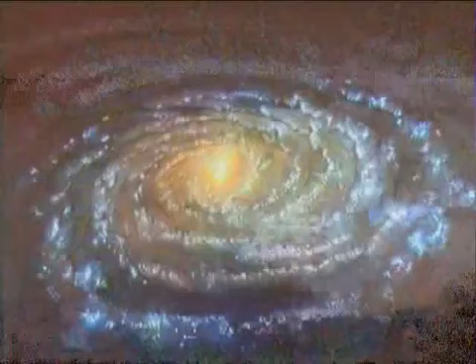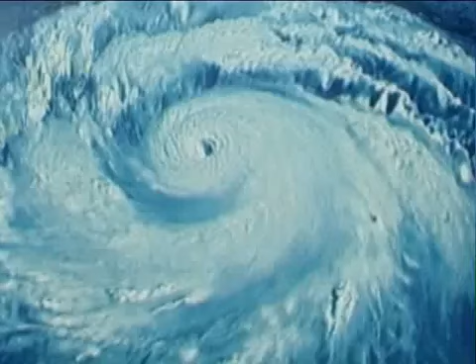And we don't perceive, even with so many spiral formations and spiral movements around us, in terms of the spiral motion of galaxies, in terms of the spiral movement of cyclones, tornadoes, and so on, that nature has chosen these shapes because they represent those artifacts, those formations, which follow her laws of constant change. Because the only thing which is constant in nature is change. And if we want to create a system for water reticulation, then we must also create, within the forms we provide, the possibility for water to change and transform and renew itself.

Viktor Schauberger, born in Austria in 1885, was descended from a long line of foresters and conservators of the forest, and in his blood he therefore had an enormous amount of information inherited, so to speak, genetically from his forebears. And the family motto was, 'Have faith in the silent forests.'

As a young man, he spent most of his time in the forest, and there he was able to perceive energetic phenomena in nature, in untouched virgin forest, which gave him so many insights into the way nature functioned, and particularly with regard to water.

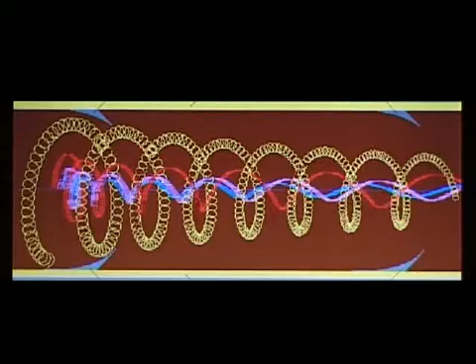In the reticulation of water for drinking purposes, it's important to generate this longitudinal vortex. While the central flow is a simple spiral, the external peripheral flow is a double spiral movement, a rotation about the central spiral, which acts like ball bearings and facilitates the faster flow of the central core water.

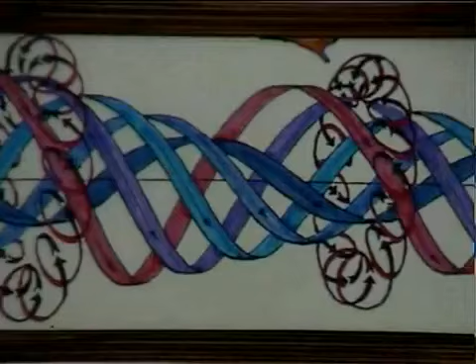This double spiral movement is inaugurated by the emplacement of guide vanes which deflect the water from an otherwise straight path into a spiral path. In Viktor Schauberger's concept, these would be silver-plated copper placed in a wooden pipe at certain intervals to create, provoke, or promote this centripetal spiral flow.

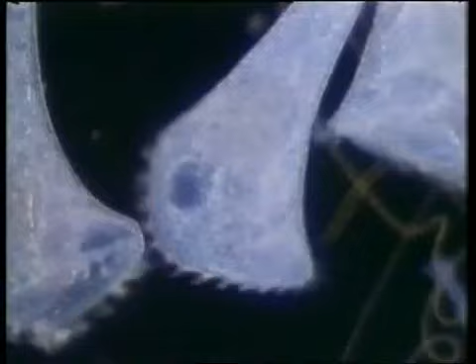This spiral movement is the rejuvenating movement which endows water with fresh energy, and also because of the movement and the way oxygen is separated from the core water and diverted to the outside, certain pathogenic, anaerobic bacteria are exposed to excess oxygen and die off. The longer the movement down such a pipe, the purer and more bacteria-free the water becomes.

Water has certain patterns of motion. It has certain energies, and these energies are derived from its motion. Unless it is able to move in the way that generates its energies, it becomes sluggish and slack. It's very important for water to be able to generate a longitudinal vortex in its flow, which enables it not only to reoxygenate itself, but also to cool itself.

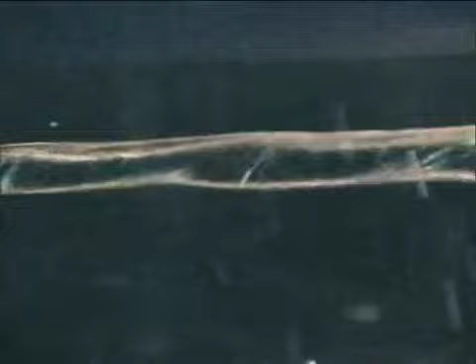The oxygen is passive and not aggressive towards the water itself. Because of this movement, the water is cool, and after it has disposed of all the pathogens by over-oxygenating them, it returns to seek union with those mother substances which are as yet unfertilized, and this increases the energy, and of course there's a certain amount of birth of new water in the process.

So you have a tremendous rejuvenation of the water body on the way to the point of delivery. The core of the vortex is identifiably cooler than the surrounding water masses, by as much as maybe 0.2 of a degree centigrade. In their summation, all these little cooling processes mean that water, when allowed to flow naturally, cools itself quite considerably.

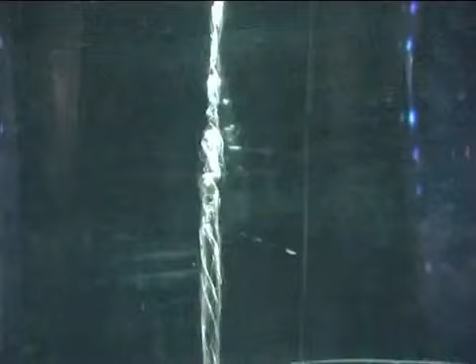And so the vortex is a cooling process. Not only that, the water re-energizes itself, and it also divests itself of harmful parasites, pathogens and so on. Because of the difference in the specific weight of oxygen and hydrogen in the water and other substances, the oxygen is thrown to the side of the pipe and directed to the pipe walls.

Water moving in such a way can transport ores and other material down the center of the water vortex without touching the sides, and can actually improve the quality of the ores, such as iron ore, in transit on the way to the point of use.

Because as the oxygen is gradually consumed, some of it by the extermination of pathogenic bacteria, there is a reduction process occurring in the water flow itself. So the iron ore is already partially reduced, so to speak, before it arrives at the smelter.

Our spinal column in German is expressed as a spiral column, and each of the vertebrae are called vortices. When you take this image in conjunction with the German view of the structure which upholds the human body, here again in their concept it is also related to movement and vortical movement.

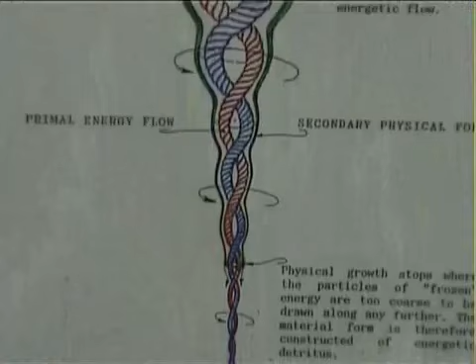Energy is primary and physical form is a secondary effect. In terms of the DNA molecule, that is the programming which creates the whole of the physical body. So in elaboration of this movement, energy creates the pathways through which it wants to move, or in which it wants to express itself. It's very important to begin to employ systems, or convert existing systems, into ways of moving water.

This follows the law governing the flow of water, takes temperature into consideration, takes the alternating, pulsating movement of water into consideration, because this is a living substance, and it cannot impart life unless it is itself alive.

There's this constantly changing aspect of natural form, reflected in seashells and in the dynamics of the universe - this whorl shape. Nature isn't workings with wheels in wheels, but whorls in whorls - one spiral moving inside another as energy, because energy must be remembered as always primary, and physical form is the secondary effect.

We have to turn this around in our heads and remember that energy is primary, that nothing can appear in the physical until it has first been conceived of energetically. The formation of anything physical is the concentration of the image until the physical form is realized. This is one of the things Viktor Schauberger stated on many occasions: energy is primary and physical form is the secondary effect.

This concentration of higher, immaterial energies gradually coalesces into energies of a lower frequency, finally having the physical effect in the physical form.

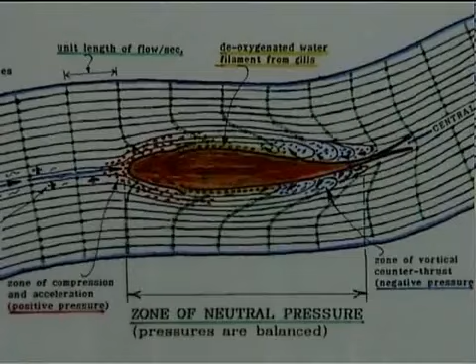So in terms of the trout, it sits with its body in the center, in the coldest core water of the stream. As the water filaments approach the body, they get squeezed aside and, in the process, accelerate. As they accelerate, they exceed their specific velocity relative to temperature, and turbulence occurs on the rear flank of the trout, which acts to actually propel the trout upstream.

The trout breathes in, taking in water through its gills and extracting the oxygen from the water, a large part of it, so that the water passes out in a semi-oxygen deficient state. As a result of its lack of oxygen, it absorbs oxygen from the surrounding water and expands, and this expansion pushes on the back of the trout, squeezing it forward like a bar of soap.

When it wants to accelerate, it flaps its gills very fast, which creates more turbulence. Also, because there's a greater expulsion of oxygen-deficient water, there's a greater expansion of water behind it, which pushes the trout forward upstream.

When we approach a new way of designing or a new way of looking at moving water, we have to design a process which allows water to change, to transform, to move, and to be itself, fundamentally to be itself.

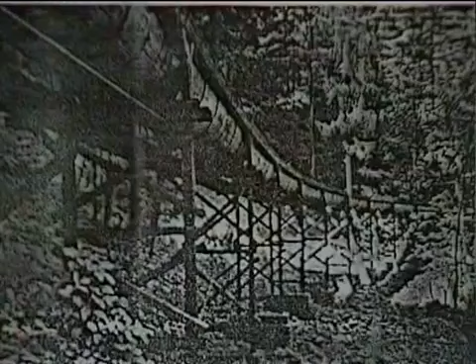There was a time when Viktor, fairly early in his days, built a log flume for the transport of logs down the mountain. It was to be constructed out of timber, in a half-egg shape profile made of wooden slats. When the workers asked him where they were going to build it, he said, you see the valley here, and see the river.

He said, that's the way the energies like to move in this situation, so we copy that. One of his great adages was: comprehend and copy nature, because nature knows best how to do things, and has known best for years.

It's only human beings who decide arbitrarily to impose their own laws, or what they think are laws, which are actually only half laws. In the case of gravity, for instance, there's the total negation of levity — there's the law of gravity, but there's also the law of levity. In fact, there's the law of both together.

So in this log flume, built to follow the contours of the valley, there were slats attached to the walls on left-hand bends and right-hand bends, so that the water was caused to rotate, forming longitudinal vortices, anti-clockwise and then clockwise, as it went around these bends.

In this first instance, built in Steyerling, this was constructed for Prince Adolf zu Schaumburg-Lippe, who was the owner of great forest estates, and the actual length of the flume was about 2 kilometers.

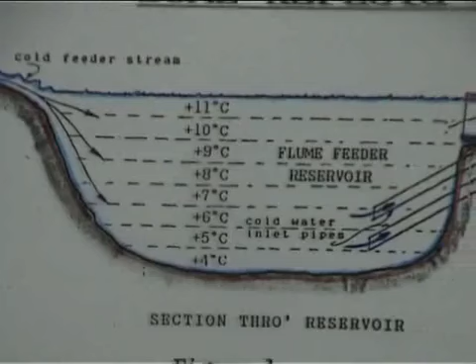The water temperature was very strictly controlled. Viktor determined that in order to make the flume function properly, in order to generate the right energies, it was necessary to introduce different temperatures of water into the flume.

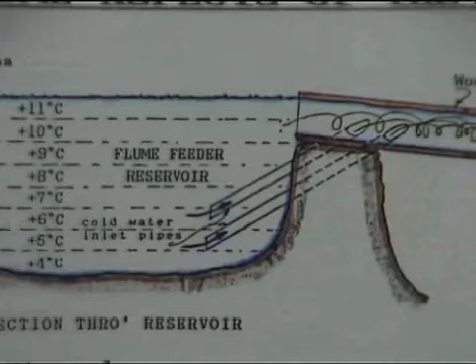From the surface of the water to the bottom of the holding basin, there's a thermal stratification — the water stratifies itself according to temperature and density, so that the coldest water, the 4-degree water, is at the bottom of the basin, and gradually the water heats as it goes towards the top.

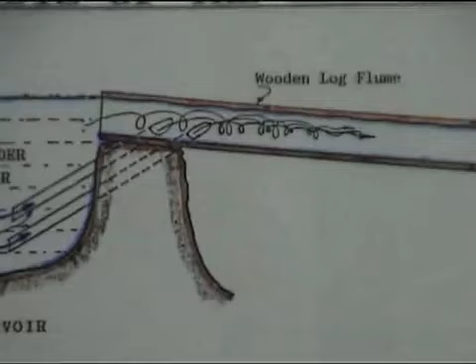There would have been a pipe taking the bottom 4-degree water out, another maybe at 6 degrees, and another taking the 9-degree water out, and these would have been introduced into the flume tangentially, so that they automatically inaugurated a spiral, vortical, longitudinal movement, in which the coldest water would have been at the center, surrounded by water with less density and greater temperature.

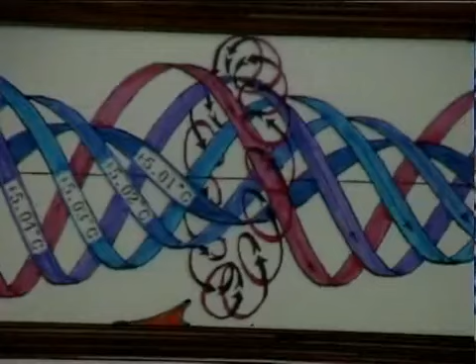The colder the water is, the more laminar its flow. That means it's more straight line movement, although it was still spiraling. And the logs, the heavy beech logs, otherwise called sinkers because they sank to the bottom, were suspended in this central vortical flow of cold water, because they were denser than the densest water, and the only place they could be was in the center of the dense water. And they were conducted all the way down these flumes without touching the sides.

His flumes were so successful that about 9 of them were built. It was this phenomenon that enabled Viktor to transport logs, which were heavier than water, down his log flume without touching the sides. These logs were known as sinkers because normally they were heavier than water and dropped to the bottom. But because of this centripetal, involutionary, inward-moving spiral from the outside towards the inside, the densest part of the water mass was in the very center of the flow, and the logs, being denser, had to occupy the densest position, surrounded by the immediately denser 4-degree water.

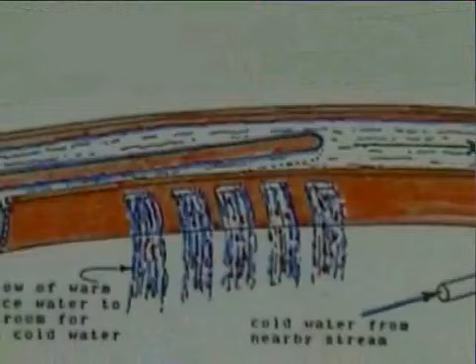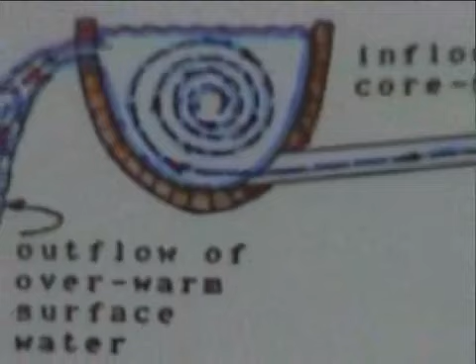So in moving down the log flume, there was a suction created in front of the log because the coldest water was accelerating, which actually sucked the log along in its wake. Periodically, because these different water temperatures eventually mixed and tended to become uniform, Viktor used to allow some water to drain out and at the same point introduce what he called energy water, very cold water from an adjacent spring or stream with a temperature of about 4.5 degrees centigrade, in order to reintroduce this central charge of very cold water which would continue to accelerate. And this is really how the log flume worked.

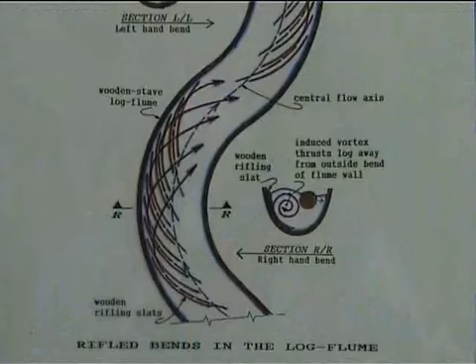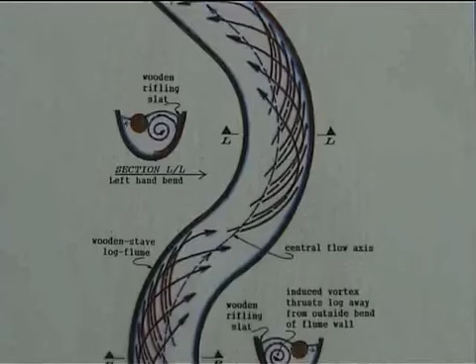There were other factors involved, relating to the way the water was caused to rotate in anti-clockwise vortices on left-hand bends and clockwise vortices on right-hand bends. To do this, Viktor had his workmen nail slats at an angle around the outside surface of the bend. The water encountering these slats was imparted either a clockwise or anti-clockwise spiral, so that when it emerged at the surface, the log was always pushed away from the bend, meaning the logs passing down the flume never touched the sides. The flume was therefore never damaged in use, nor were the logs, and they arrived in absolutely impeccable condition.

On the first day it was used, one of the criteria determining whether Viktor was to be paid was whether the flume would deliver 1,000 solid cubic meters of timber in one day. On the first day of operation it delivered 1,600 cubic meters of timber, and Viktor Schauberger was paid. Everybody else, all the experts, were furious at this success, because it showed that somewhere in their hydraulic theory there was a great error, a great misunderstanding of water.

Viktor used to say in this regard: how can you possibly understand how water, a living substance, behaves when the only place you test it is in laboratories instead of out in nature, where water acts in relation to nature's laws and not the laws you have contrived in your places of research.

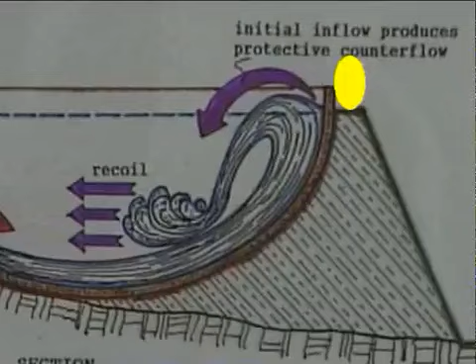Viktor gave them no answer and went down and stood right in the middle of the wall opposite where the water was going to flow in. Then he gave the signal by firing two shots of his carbine to allow the water to rush in, which it did with tremendous force and volume. Viktor said to the people gesticulating, saying 'Come back, you're going to be killed,' he said, 'What does it matter? If I'm a fool, then I'm going to be swept away, and so will my theories at the same time. But I believe in what I'm doing.' And so he stood looking over the wall, watching the water flow in.

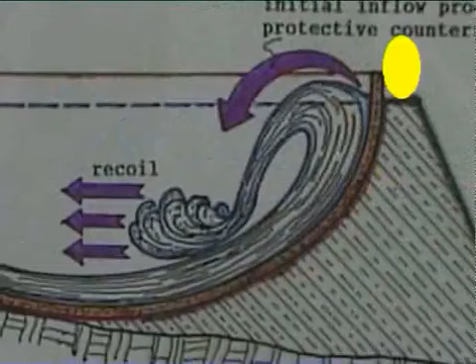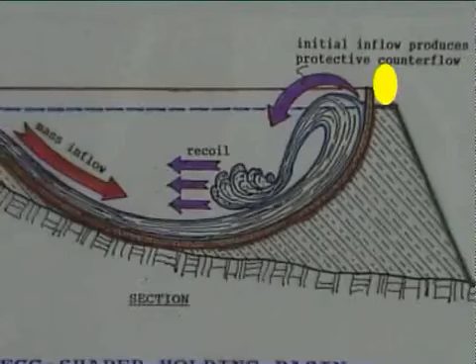And the water actually flowed in around the sides of this egg-shaped basin. When they converged at the far end, they produced a counter wave which moved back in the direction of the inflowing water, about 4 meters high, full of mud and rocks and things, and therefore exerted a counter pressure against the incoming water, and the egg-shaped holding basin held.

And the experts were absolutely dumbfounded. Why should it have done this? And they then asked him, where did you get the idea for this basin? And Viktor said, well, a common chicken told me how to do it.

And finally, when they calculated the strength of the walls statically, they were found to be 12 times stronger than they need have been in order to resist the inflow of water and to be able to support the sides of the basin when it was full.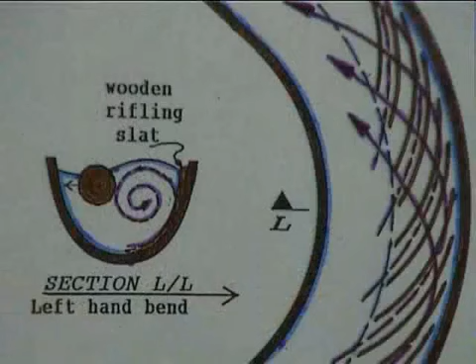So this log flume is an example of how we might construct systems for moving water where there is a continual alternation of movement, of swaying movement, with different vortical flows, so that the water is able to regenerate itself and to cool itself. Preferably these should be enclosed, so that there is also no access to the water from the sun and from extra too much heat.

They timed a block of wood flowing from the holding basin down to the mill in the early morning, when the water temperature was about 8 or 9 degrees, and it took 29 minutes to cover the distance. Later in the afternoon, they got the same block of wood over the same distance, and the water temperature had by this time risen to about 14 or 15 degrees, and the block of wood took 40 minutes to cover the distance. So it shows that with increasing heat, water flows more slowly.

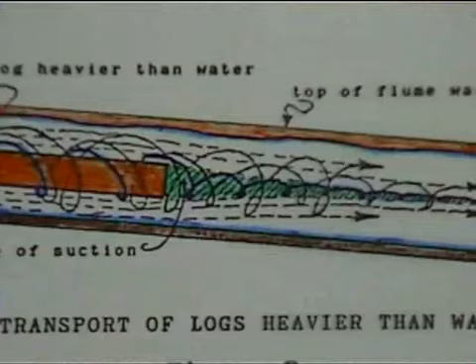So this process was employed in his log flumes, and it is a basis by which we could redesign any new water conduits which have to be constructed in this country.

There are other systems which probably could be used to improve what is there already, and that is the incorporation of vanes in an open channel, which would cause the water to rotate as soon as it hit them, making the water rotate or make a double spiral movement down the center of the channel, which would again allow water at least to breathe and reoxygenate itself and to cool itself to a certain extent.

But flowing in straight trapezoid channels, which is the general system of moving water according to modern hydraulic theory, physically kills water until what arrives at the other end, the point of use, is virtually a water corpse, apart from the fact that it's also been chlorinated, and the chlorine, while it does remove bacteria and other sort of unwelcome organisms, will also finally sterilize the blood from people who drink it all the time.

And research has shown that 18% of bladder cancers and 9% of intestinal, rectal cancers have been caused by the consumption of chlorinated water. So when we drink chlorinated water, we actually harm our immune system, and we drag it down to a level where the body is more likely to fall victim to disease.

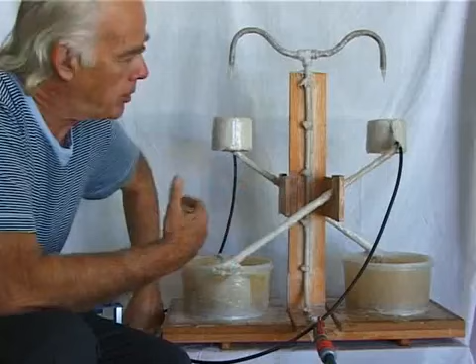This is a device. The arrangement of it was first designed by Lord Kelvin about 1880-85, and he called it his influence machine, because it demonstrated the influences of fields, in this instance static fields and positive and negative fields.

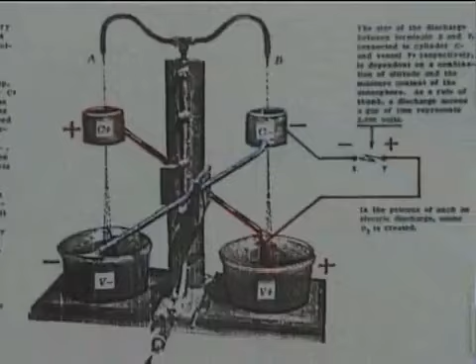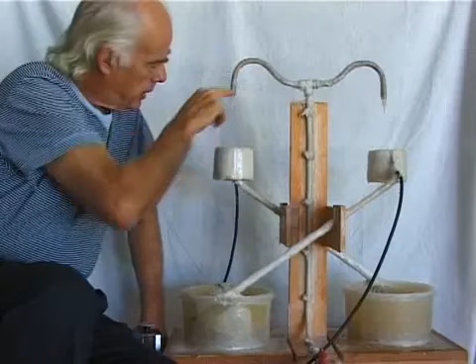Water is supplied through this vertical pipe here, splits, and then comes down, pointing downwards, and ends up with a very, very fine, the finest hypodermic needle at the end, so that the water jet coming out of this is as fine a jet as you can get.

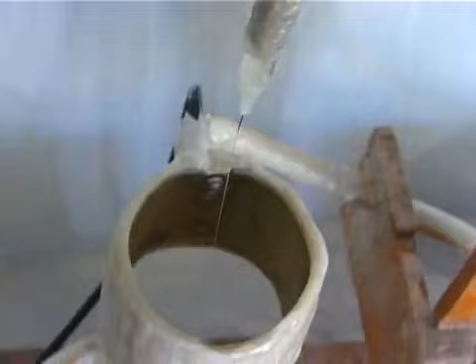Inside this cylinder is a cylinder of brass in order to collect the charge which is falling from here. This cylinder is coated on the outside with paraffin wax to isolate it so that the charge doesn't leak outwards from it. This is the same cylinder.

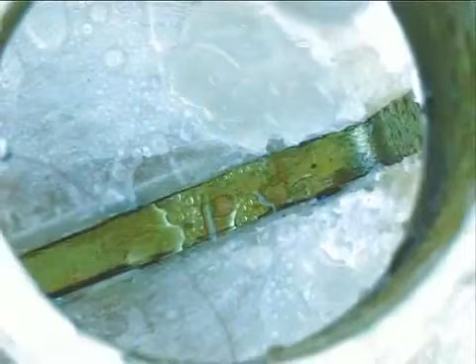And this diagonal here is a copper rod which is attached to the brass here and also attached to a strip of brass in the bottom of this receiving vessel. So the charge here is the same as the charge here.

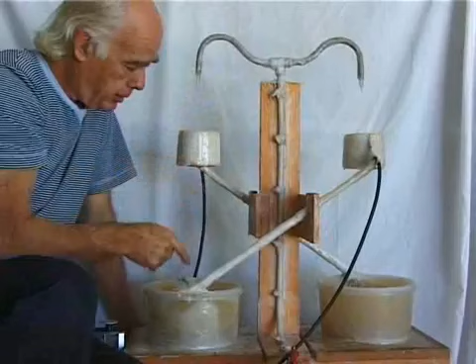And when the water falls through, it generates either a positive or negative charge here, and the charge is reversed by the time it hits the bottom. And so a charge builds up here, let's say positive, and here negative.

And according to Kelvin, the build-up of the charge is unlimited, and over each of these, or between all this arrangement, you get a negative static field builds up on this side and a positive static field builds up on this side, which can theoretically go to infinity.

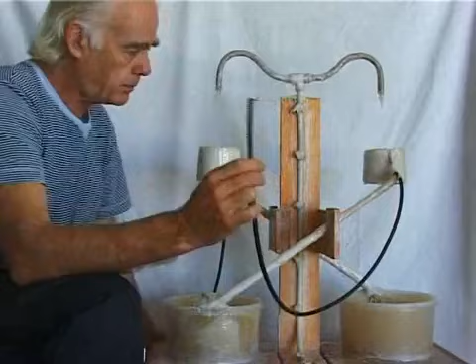From each of these cylinders there's a black cable, which is a high tension cable, and these can be used to bring the charged field to where you want to use it. For instance, on the neon tube.

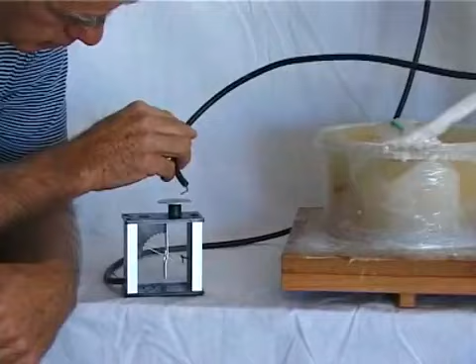And on the electroscope. To demonstrate the charge in falling water, the charge is transferred to the inside of this, causing the foils of the electroscope to flap. There's a charge which is transferred inside without even me touching it. And if I touch it, then it's quite strong, and it'll go on flapping like this.

And as Viktor Schauberger said, very good quality water would cause this to flap 150 times before it ceased doing so. The lower the quality of the water, the fewer times it would flap.

A water molecule is a dipole molecule. That means it has a positive and negative charge at each end of the molecule. And when it falls, it generates a charge because it spins. And so it generates both an electric field and a magnetic field.

And this is why, with a fall distance of maybe 2 kilometers or a kilometer, when rain falls onto the ground, it comes with an enormous charge in it. And this charge is imparted directly into the plant when the rain hits the plant's leaves, which is why rainfall is much more productive than irrigation water.

These very small, thin jets of water falling out of these hypodermic needles generates a charge. It's really a small thunderstorm, this machine, because it demonstrates that in the clouds, charges are generated by falling water, which eventually ends up in the discharge of lightning.

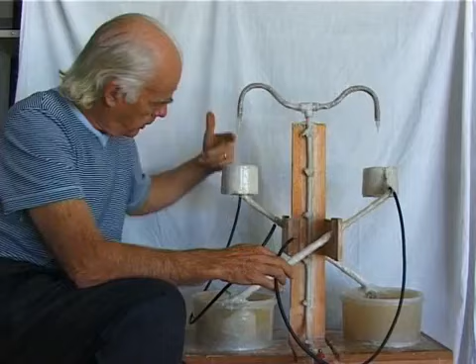So in the thunderstorm, very powerful positive and very powerful negative fields develop, and they short circuit through a lightning strike. The water falling through here develops a charge, and as like charges repel each other, then at the bottom this jet starts to spread out sideways, and the water will

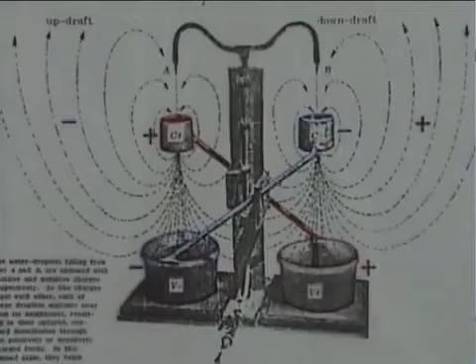actually start coming up again and then going down again. So in this movement you can begin to see why there are such strong up and down drafts in thunderstorms.

And this, of course, is a very, very small scale, and I have, using this device, generated a spark which will jump across a distance of 2 centimeters. Every millimeter jumped represents 2,000 volts. So the 2 centimeters that I achieved with this device represents 40,000 volt discharge. I can only say if you happen to hang on to it yourself, you really jump.

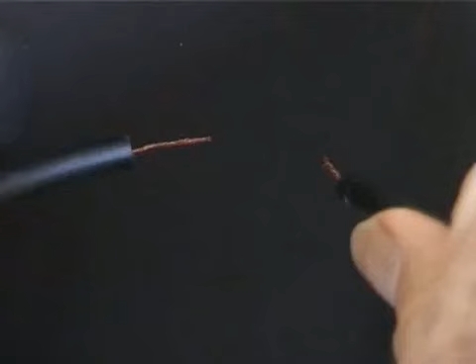There seemed to be a correlation between altitude and the length of the spark gap. There also may be other variables such as air humidity and air temperature as well.

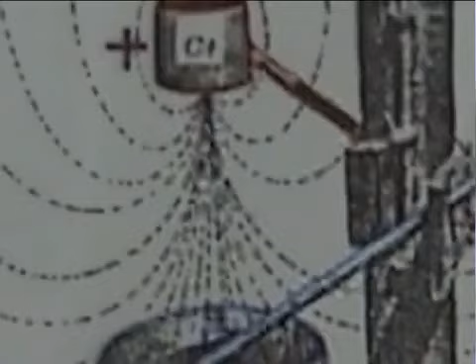The idea is to create an implosive turbine where the water is moved from the outside inwards instead of the inside outwards, which is what's happening with all conventional propellers. Think in 3 dimensions, in a very complex geometrical system which can't be described by the straight line, circle and point.